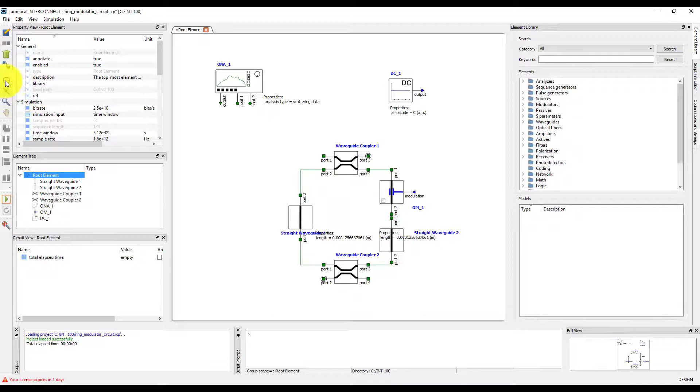First, delete the connections from the ONA and the DC source. To ensure that the ONA result data is not carried into the compound, we'll remove the circle around the port that was previously connected to the ONA input. To do so, go to the Mouse Mode toolbar and click on the Monitor Ports button. Then click on the circle. Now let's go back to using the Select cursor.

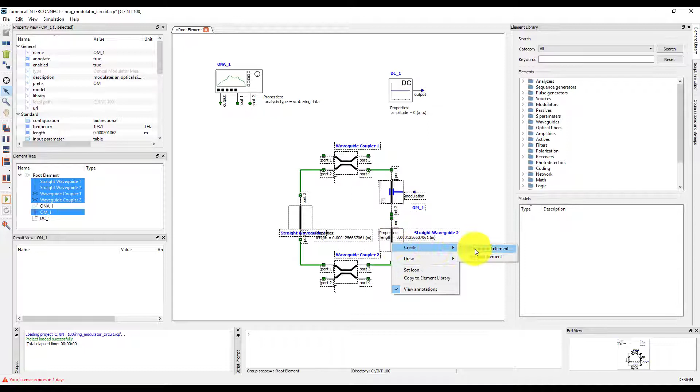Now, click and drag in the viewport to select the elements to group together. Right-click and choose Create Compound Element. The selected elements are now inside this compound element. Select the compound element, right-click, and select the Edit option. The Property Editor tab lists all the properties of the compound, and the default properties are inherited from the root element.

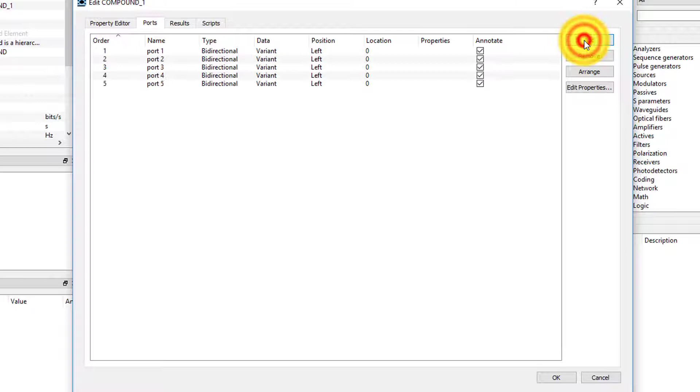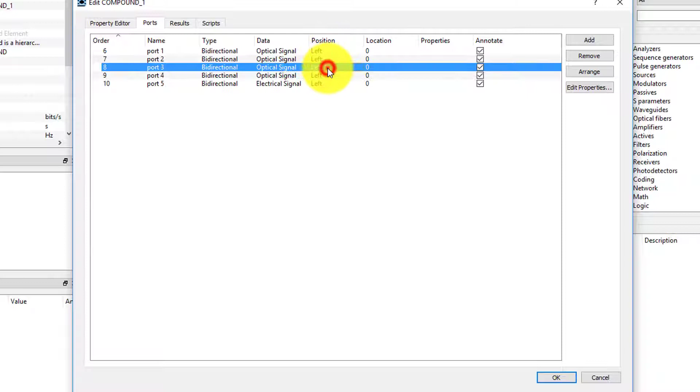In the Ports tab, I can add 5 ports by clicking the Add button 5 times. The data for 4 of the ports should be optical signal, and the 5th should be electrical signal for the modulation signal. All port types are set to be bidirectional. I can set the location of where the ports will appear on the element icon. Click on the Arrange button, which sets the location of each port in order to have even spacing between the ports.

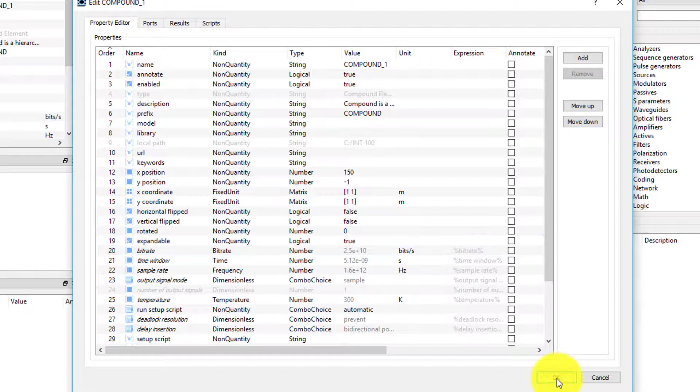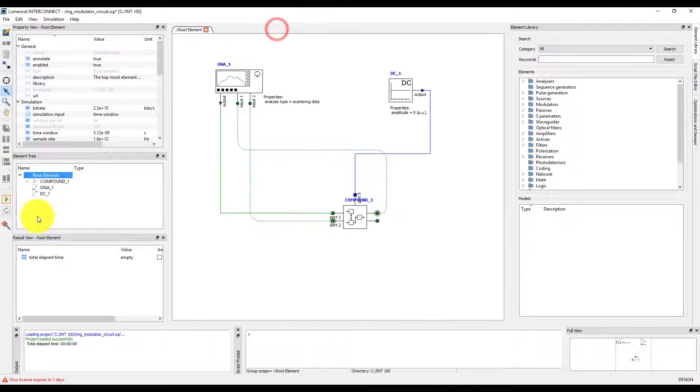The Results and Scripts tabs allow us to define custom result variables and to use scripts to set up the internal elements. Click OK to accept the settings. I can now connect the ports to the ONA and DC source. Next, select the compound element and right-click to select the Expand option to open a new viewport tab that shows the elements in the compound and the relays that correspond to the ports of the compound element. Connect the relays to the circuit. At this point, we can run the simulation and see the same gain result as before we created the compound element.

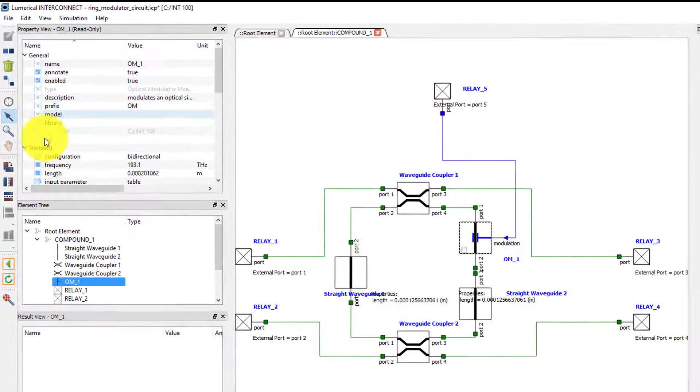If we were customizing the model to represent a Foundry component, we could load modulation data from the Foundry. In the optical modulator standard properties, I can set Load from File to True, and select a data file containing the measured data, which could contain the real and imaginary parts of the effective index, or absorption and phase as a function of the modulation voltage.

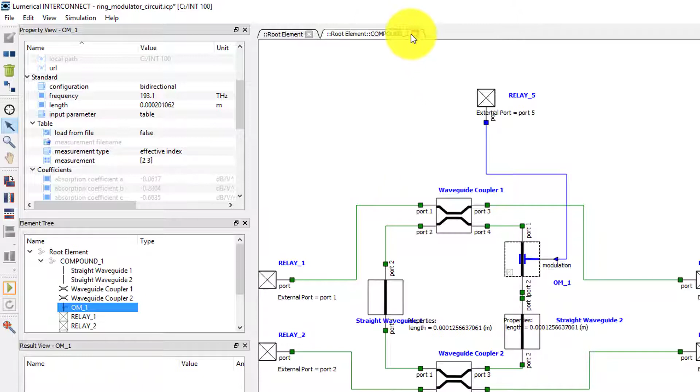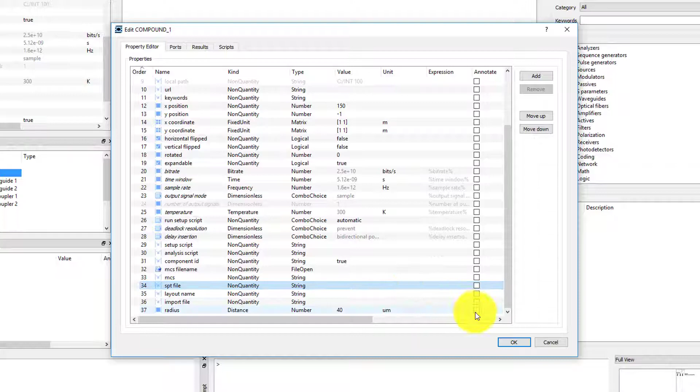To show the parameterization capability of the compound element, I'll edit the compound again and add a property called Radius, which will be used to set the lengths of the straight waveguide elements that make up the ring. Set the kind to distance, which will allow me to set the length units for this property. Set the value to 40 for a length of 40 microns. I can select the Annotate option so the value of the property will show up in the schematic. Under the Scripts tab, I can add a setup script to set the length of the straight waveguides as a function of radius.

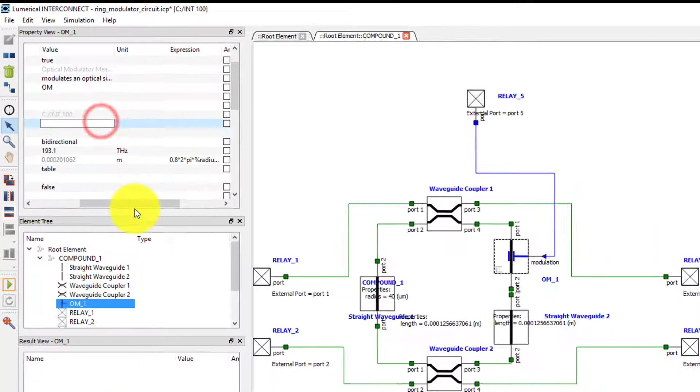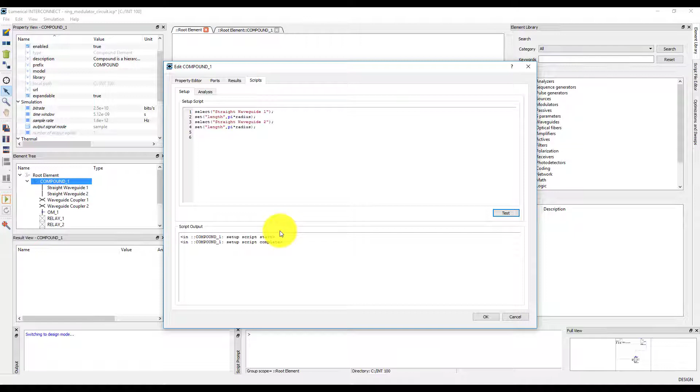Click on the Test button to check to see if there are any errors within the setup script. The script output shows that the script completes with no errors. Click OK. I can now change the radius of the compound element in the Property View window and the lengths of the waveguides inside the compound will automatically be updated.